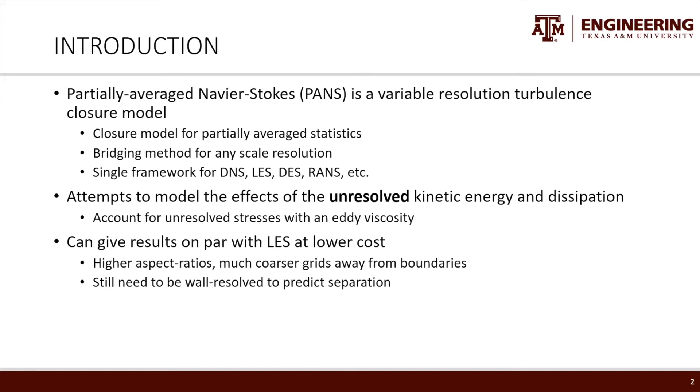So this is kind of the most common way of approaching PANS, to take something like RANS-like transport terms and modify them to be for any level of resolution. And the idea is that this should hold for any level of resolution. So it should hold for DNS, it should hold for RANS. And you have these parameters called FK and F omega for this term, or it can be F epsilon depending on what approach you take.

The idea is these parameters control how much of the kinetic energy and how much of the dissipation you're not resolving. So it's the ratio of the unresolved to the total terms. And ideally, you would know these terms exactly at every point of space and time, and then your turbulence model would work perfectly, but it's not an ideal world. So these are parameters that you have to set, and they depend on the grid.

So these terms can vary from 0 to 1. If you set it to 0 for both, that's DNS. You're essentially turning the PANS off. If you set it to 1, you're fully unsteady RANS. And the idea is actually to just toss in a bit of RANS in some points in space and time to try to up the accuracy a bit. You generally turn it on very little. The levels of this are generally less than 0.5. If you get too high, you're just unsteady RANS and the results aren't that great.

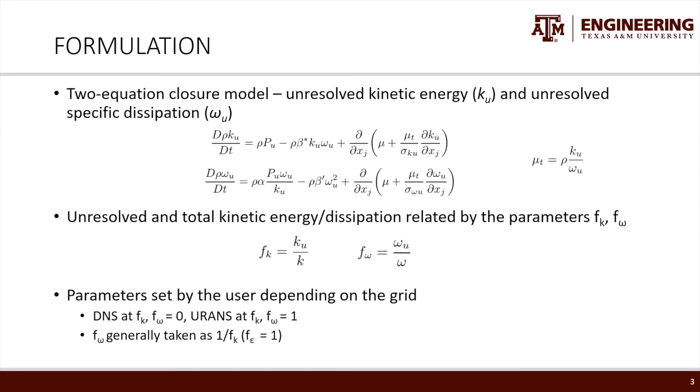So although these are 2 parameters, in practice it's actually just 1 parameter. The idea being is dissipation. When you take LES, you really don't resolve any of the dissipation scales. Only at DNS are you actually resolving dissipation scales. So your F epsilon would be 1. And just by the relation of omega to epsilon and k, you have a fixed value for F omega. So you just have a 1 parameter model, FK. It's never great to have parameters, but we'll show how the parameters affect some results, and then later on we'll show how we can just figure out the parameter on its own.

So to implement this into PyFR, really any finite element method, it's definitely not as straightforward as it would be in finite volume methods. One thing being physical constraints. So you have to make sure that your kinetic energy and your dissipation are positive. The reason being, well, one, physically, dimensionally, they have to be positive. But if either term is negative, then you have negative eddy viscosity, and then you have anti-diffusion and your code blows up. So making sure things are positive is not straightforward in finite element.

One trick that people who do DG RANS do is for the omega term, instead of solving for omega, you solve for the log of omega. And then when you use it in your eddy viscosity, you take the exponent of it to recover omega. And this guarantees that the term is strictly positive. Now K has to be strictly positive as well, but you can't do the log term because K is 0 at the wall, and we can't have log of 0.

So the way we approach the K term is kind of a hack, but the idea is if K ever goes negative, you add a source term on the right-hand side, which just pushes it right back towards the lower limit of what K should be.

Now, the computational cost of doing this actually varies. It's usually more expensive, but it can be cheaper in certain scenarios. So immediately, you have 2 extra transport equations. So there's a 40% increase right there. And in some rare scenarios, you could have a time step restriction because the eddy viscosity can increase your diffusive CFL. In practice, however, that never really happens. The idea being eddy viscosity goes to 0 at the wall, and that's usually where your finest cells are. So usually not a problem.

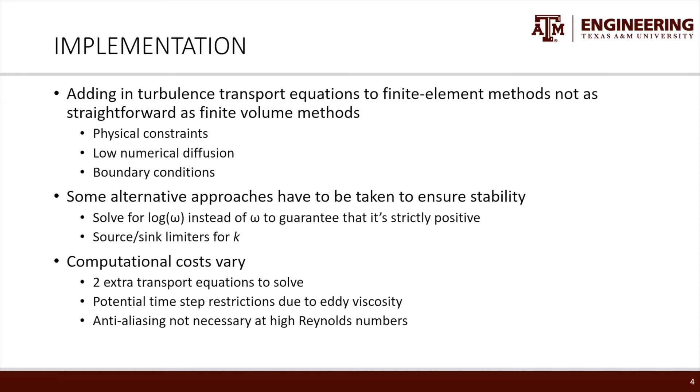So the case we're using for a benchmark is this cylinder at a Reynolds number of 3900. It's a pretty canonical test case. It's actually quite complex, quite a bit more complex than higher Reynolds number flows for the cylinder. The reason being you have this laminar separation, then this free shear layer which transitions, and then you have a turbulent wake. And if you don't really resolve the intermediary steps before you get to the wake, you have quite different results. So it's a great test case for any sort of model.

The other benefit is there's a lot of literature for this case. We're going to be comparing DNS from the PyFR group, and both experiment and LES from Parnaudeau. And we take a very under-resolved grid. So the idea is to just chuck a highly under-resolved grid and compare what PANS would do to pure Navier-Stokes. I called Navier here UR-LES, so under-resolved LES. And we want to compare what the FK parameter does to the simulation and how we can figure out what FK should be on its own.

And the grid we're looking at is something like 2.5 million degrees of freedom. So I think that's on the order of 6 to 8 times less than what the DNS and LES would be. It's quite resolved very close to the wall, but then grows really quickly. And that's the approach we want to take with PANS in higher order.

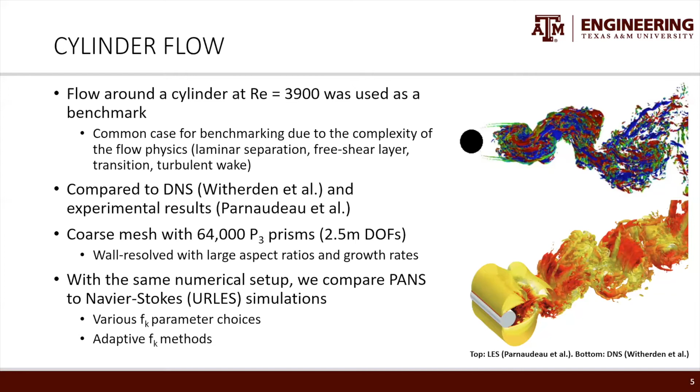So here we have some mean statistics. The left-hand side would be the centerline velocity, with the DNS being the black dots. And on the right-hand side, we have the streamwise velocity contours. So the experiment's at the top, and I added this red line to note where the edge of the recirculation region is. So these red highlights indicate zero velocity.

So pretty quickly on the left-hand side, you can see under-resolved LES performs quite poorly. The recirculation region is vastly under-predicted. When you add the PANS models, depending on the FK, pretty much all the results look better than under-resolved LES, but there's this FK parameter of 0.1 for this case where it matches very closely to DNS. And here you see the same thing. FK 0.1 matches really closely with the experiment as well.

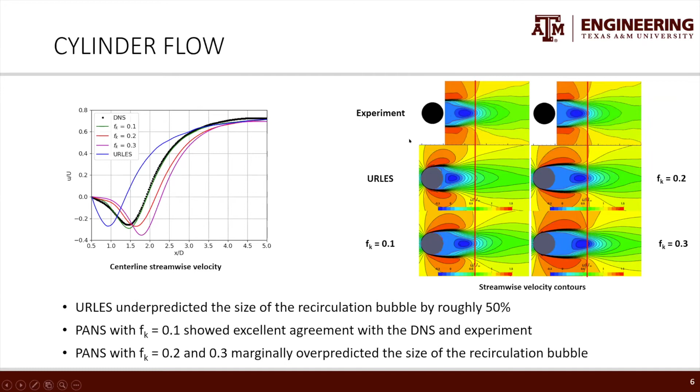Now, when you look at the velocity profiles at certain X locations, they actually look better with varying FK. So here on the top, we have the streamwise velocity. The bottom row is the normal velocity. And this is at 3 different X locations. So under-resolved LES gives quite a poor prediction of what the velocity profiles look like, especially in the wall-normal direction here.

The FK 0.1 parameter, which seemed to work well in the previous slide, also pretty much exactly matches the DNS here. You see there's just a slight bit of deviation here, but in general, PANS with any FK in this range, which we don't really go outside of, I don't think anyone really does FK over 0.5, improves the results.

And that's kind of the idea. We're not trying to get perfect results. We're just trying to see, for cases where you can't actually do resolved LES, can you get something that's a better prediction than just doing under-resolved LES?

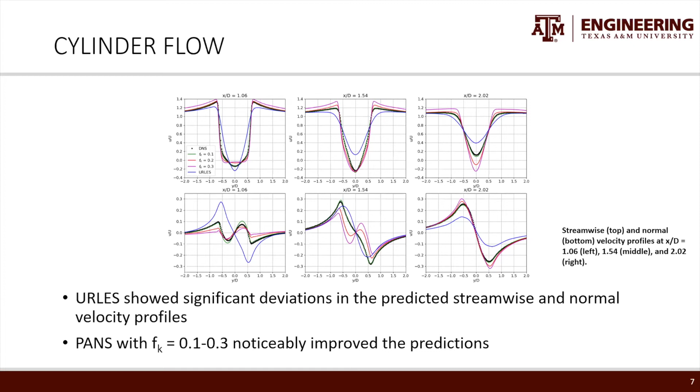I didn't show the normal velocity variance profiles. Those wouldn't be quite interesting. Under-resolved LES does it poorly. It was quite easy for PANS to predict normal velocity variance, so all the different FKs work quite well.

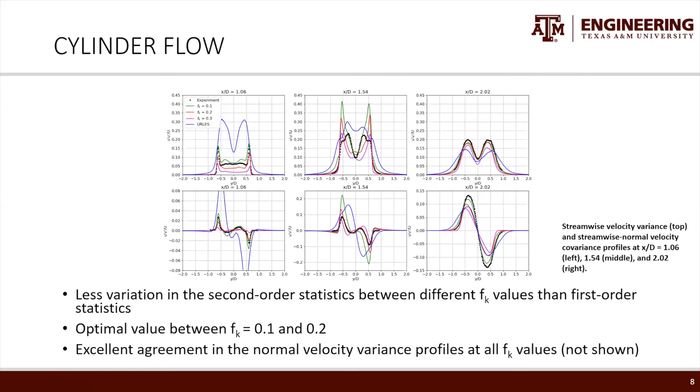So these are results with a free parameter that you have to tune, and no one really likes to tune parameters. So the idea is, can we take this approach and let the solver just figure out what the optimal FK is? This method is called adaptive PANS. And to do that, you need to be able to quantify how much turbulent kinetic energy you have locally and what you can resolve. So, what's the ratio?

And the way you do that is you need the physical length scales of a problem versus the length scale that your grid can resolve. Now, one approach proposed by Girimaji and Abdol-Hamid, Girimaji being the man who invented PANS, is to use the turbulence variables to calculate an unresolved length scale. So here you have square root of k over omega. This beta star is not a tunable constant. It's a relation between epsilon and omega.

So the idea is you have this unresolved turbulent length scale, LU, and if you compare it to delta, which would be either your average grid size per element, or the minimum spacing in X, Y, and Z, you take the ratio, and FK is some function of that.

So there's a constant C PANS here. It seems like you took one constant and transformed it into another free parameter problem. But generally, it's not a tunable constant. There's actually a physical meaning to what C PANS should be.

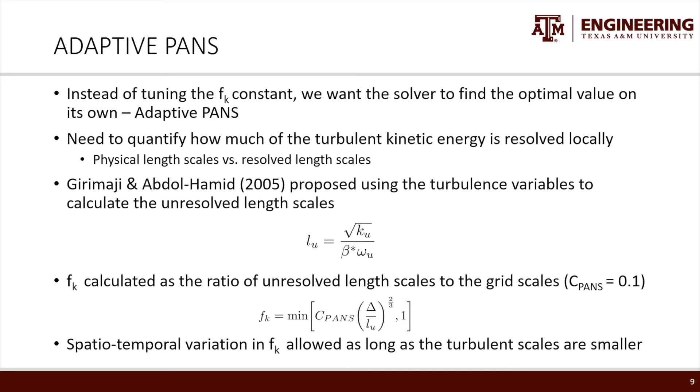So, however, if you want to be really nitty gritty, there are terms you can add into the formulation, the physical terms, not model terms, that account for the fact that FK changes. This is related to turbulent kinetic energy conservation between 2 points. So there's this adaptive PANS method that came out. It's kind of really for finite volume methods.

And the idea we were having is, can we take the benefits that we get out of higher order methods, can you leverage that to help you figure out FK in a different way? And the benefit you get with higher order elements is you have this structured representation of the solution within elements. And with that, you can turn it into a modal representation of the solution.

And the idea is, if one's not familiar with it, if you have a nodal representation here, the solution is the black one. It'd be, for example, Lagrange interpolating polynomials where they each interpolate one of these points. The modal representation is, for example, Legendre modes. You have essentially frequencies corresponding to different variations in the solution.

Now, the benefit of this modal representation is if you take out the mean mode, which is this L0, which in this case is not very interesting because it's 0, all the other modes, the non-zero modes, correspond to fluctuations within the element. So if you integrate the square of them, you get a good representation of the fluctuations that you're resolving.

So if you take, for example, the velocity magnitude and we integrate the fluctuations, we get a good representation of the turbulent kinetic energy that we can resolve. And here P-tot is the total order term to account for the fact that we have 3D elements. So with this resolved kinetic energy approximation, we can calculate an FK. It's not the same formula as in the previous slide.

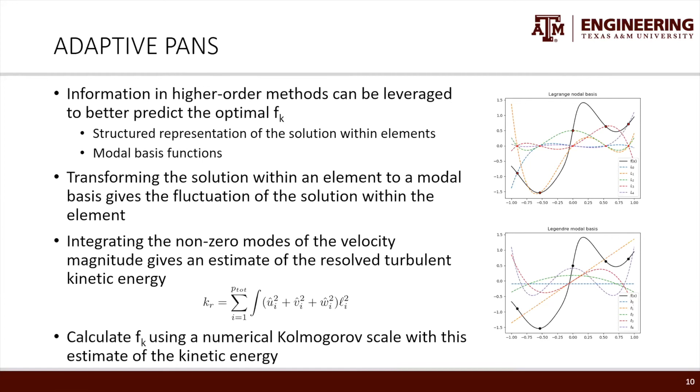So here we show what the FK field is instantaneously at a T of 100. So Girimaji's method is on top, the modal method is on the bottom. When you look at the far field, they're not too different, but what I want you to focus on is this region right behind the cylinder. Right behind the cylinder, you have a laminar separation region and you have no fluctuation.

So if your FK prediction method was accurate, you should have 0 FK or near 0 FK right behind the wall, which in the modal method you do get, which makes sense. I mean, the resolved kinetic energy would be 0. And with Girimaji's method, you don't actually get a good representation of this laminar separation region.

So the differences are slight, but you'd expect that to make quite a big difference because the results farther in the wake are very dependent on how accurately you resolve the physics near the wall. So the FK we take is constant within elements. For the modal method this is required because the modes have support over the entire element.

For Girimaji's method, it's not required, but we set it to constant as the average of the cell just for consistency between two approaches. And there's several ways you can implement this. Especially for statistically transient problems, you can do on-the-fly adaptive FK, where you calculate FK at each time step, or for cases which are statistically steady, you can actually average the FK over time and just use that, and that actually works quite well.

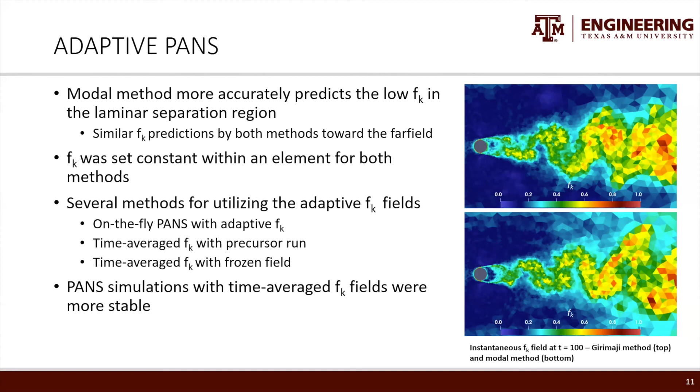So when you look at the results for the adaptive method, G representing Girimaji's method, M representing the modal method, the idea is it doesn't have to be perfect. It doesn't even have to be better than a constant FK case that you tune. You just want something that's good enough. The Girimaji method got somewhat close to the DNS results. The modal method got very close to DNS results, pretty spot on with the FK of 0.1 case. And the same results you see with the velocity contours: the recirculation region length is pretty spot on.

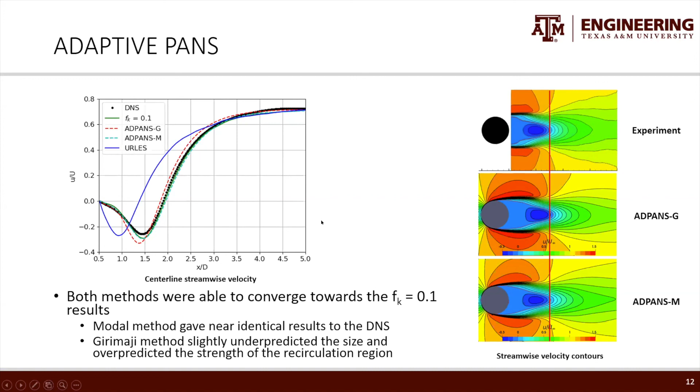When you look at the velocity profiles at certain locations, this is the same kind of results you get from the previous slide, but the modal method was actually better in certain scenarios than the constant FK case that we tuned. The modal method was pretty spot on with the DNS everywhere, in some cases even hard to see because it's exactly over the DNS. Both methods are able to converge towards these optimal FK values, and the modal method does it marginally better.

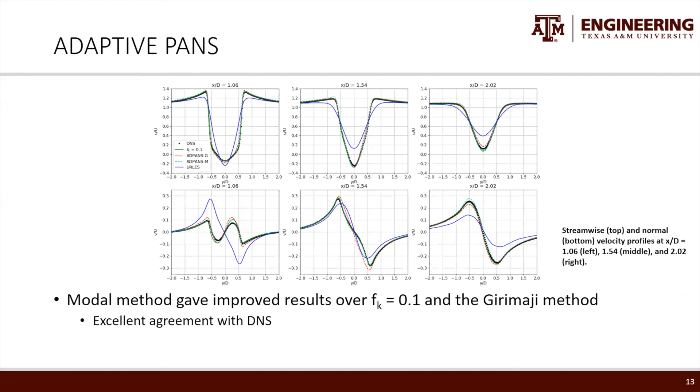Now, for the second order statistics, in some cases one method is better, in some cases the other is better. They're generally better than the constant FK case in most scenarios, but in others the constant FK case does predict it a bit better. The idea is not to get perfect results, just something close enough to an optimal FK case. If you spent enough time tuning the FK constant, you would get better results than any adaptive method. But can you have a fire and forget way of approaching this problem?

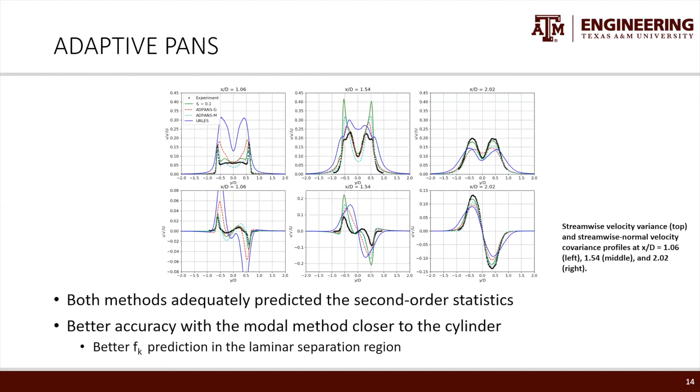So in conclusion, we implemented a two-equation PANS model, the k-omega SST model. The case we used for benchmarking was the cylinder at Reynolds number 3900. We showed how a fixed FK changes the results. There are optimal FKs, but any FK you choose is an improvement over under-resolved LES. And with FK 0.1, we have pretty good agreement with the DNS and the experiment.

And the results I didn't show, to not clutter the graphs, is that PANS has been run on this case before with finite volume methods, using something like 2.5 times the degrees of freedom we were, and you get better results with higher order with half as many degrees of freedom than with finite volume. So there's actually a benefit of doing PANS in higher order.

Something we tried was leveraging this higher order representation of the solution within elements to figure out the optimal FK. There were some improvements in accuracy over the current adaptive FK methods that work for finite volume solvers. In general, the future work is to go towards high Reynolds number flows that aren't even possible by current LES standards, and see how well they compare to experiments.